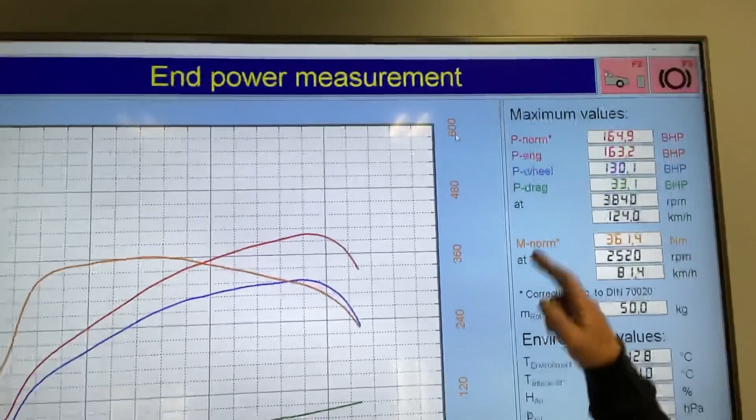So we'll have a look at the dyno graph of it standard. She's made 164 brake horse, 361 newton meters of torque.

Now they do these in a number of different software versions, different brake horse powers, shall we say. They do the 114, which is 136 brake horse. They do the 116, which this one is, which is 163 brake horse, and then they do the 119, which is 190 brake horse.

Now all the engines in them are identical, so the 114 to the 119 is identical engines. So the 136 brake horse model will tune exactly the same as the 116 does, and exactly the same as the 119 does.

We'll just load the tune graph up now and show you what we've got from it. Just bear with me while I load the tuned graph, I'll overlay the standard as well.

So this is the tuned, our custom tuning, and again with correct calibration, not a single torque monitoring touch. It's running absolutely OEM Mercedes software, just with our tuning in there. So it's absolutely on the money.

I'm really pleased with the hard work that I've put into them. I'm absolutely made up that this is the results it's given.

230 brake horse, so from 164 to 230. More importantly, with 507 newton meters of torque.

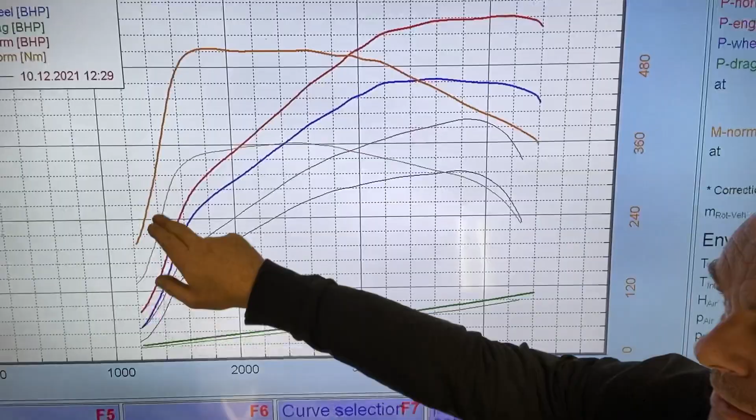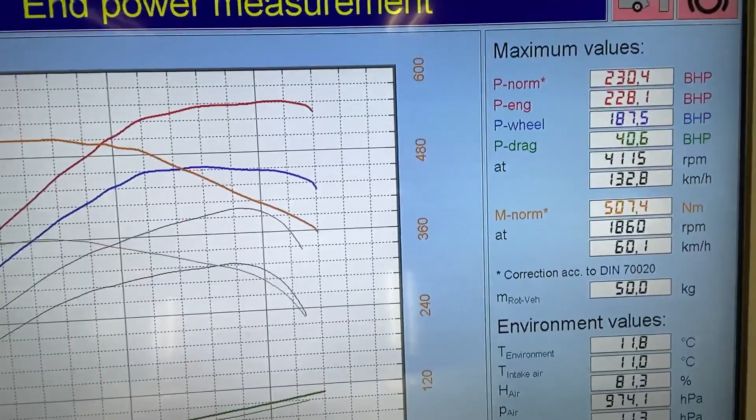So we can see the graph. The thin lines are the previous and the bold lines are the tuned. The bottom scaling - 0, 1,000, 2,000, 3,000, 4,000, 5,000 - that's the engine RPM. This scale up here - 0, 50, 100, 150, 200, 250 - that's the brake horsepower. And this axis up this side - 0, 120, 240, 360, 480, 600 - that's the torque.

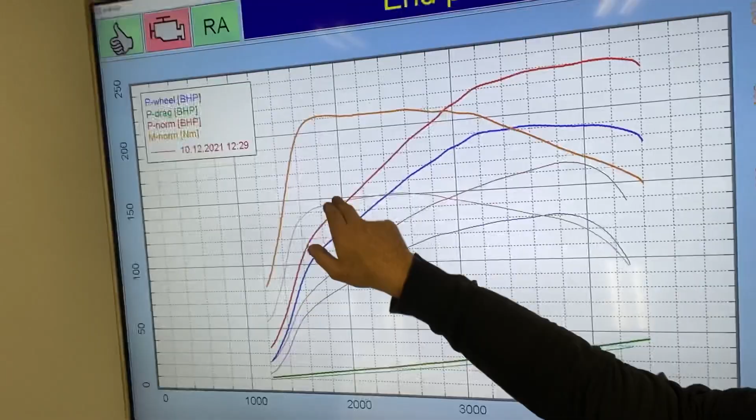So we can see the gain in torque we've got is absolutely colossal across the mid-range, low down, and also holding way past 3,000 RPM.

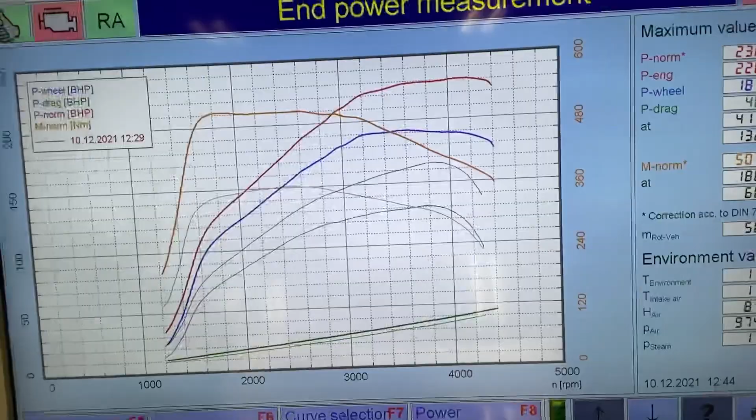So we can get a better image of that for you without my head in it. So that is correct tuning on these.